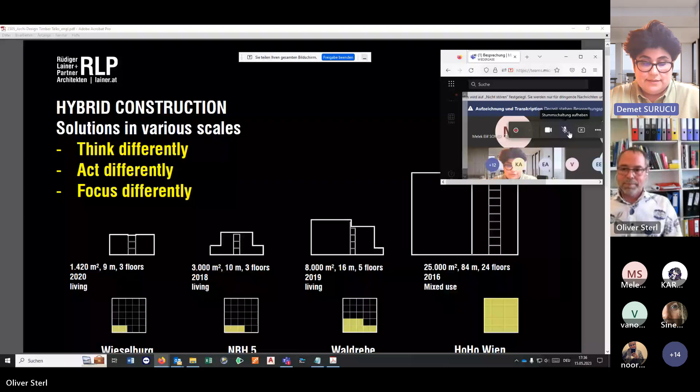Sterl has also made significant contributions to architectural endeavors such as the housing complex and kindergarten, Haus mit Veranden in Vienna, the apartment and old people residence in Döbling, Vienna, 2012, and various apartment buildings throughout Vienna, 2014. Sterl has displayed a strong commitment to architectural excellence and innovation. He has been involved in notable projects such as the extension of Schottenring 19 in Vienna, the residential project Sonnwend-Quartier, the apartment building and service apartments in Quartier Belvedere Central 2018, and the pioneering timber high-rise HoHo Wien in 2014.

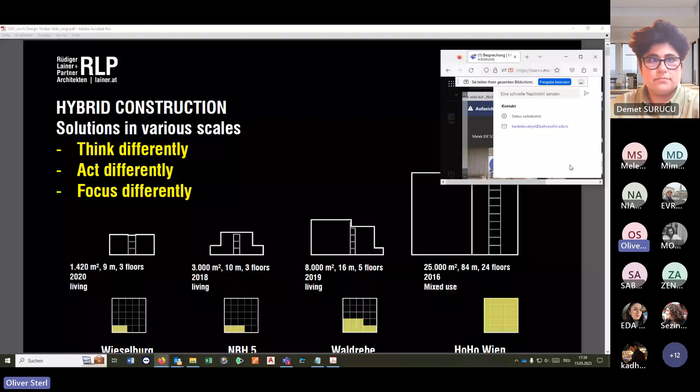We have an 84 meter high wooden skyscraper, which is called the HoHo, the Holzhochhaus wooden skyscraper in Vienna. We have a 3-story row house and a 5-story ensemble of 3 wooden buildings.

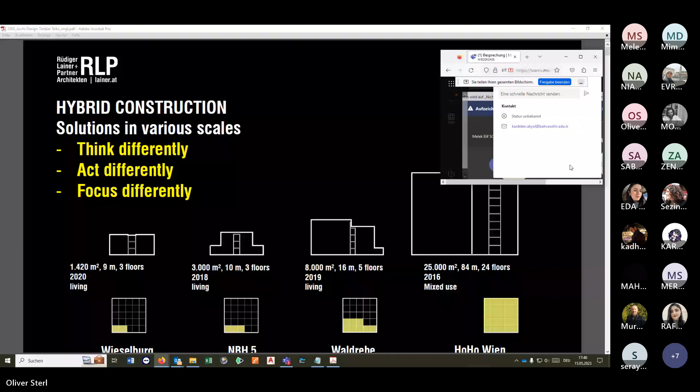Architecture is a team sport, and this is part of our team. We currently have 18 employees. The office is situated right in the heart of Vienna and was founded some 40 years ago by Rüdiger Lainer in 1985. Since 2005, almost 20 years, I'm partner in the office and managing director of RLP. The range of our work spans from urban development to renovations to new constructions, a lot of office and residential buildings, especially subsidized housing, in Vienna and around Vienna.

What you can see here is a sheet with examples of our buildings. I will not go into details today; we don't have enough time for this, but I will focus on the wood and wood hybrid constructions. First of all, nobody is born as a timber architect, and neither are we. To be honest, it took us some time and some coincidences to gain experience in this field. We came across timber construction more or less by accident, a bit like the virgin to the child. It started with an urbanistic project.

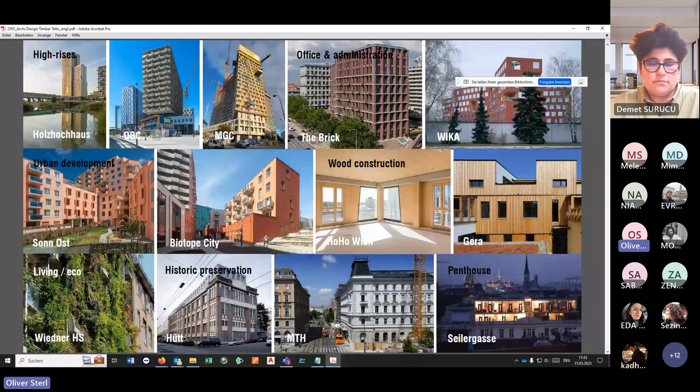A year later, 2014, this investor added a Styrian company called Schachner Haus, a timber construction company, to his portfolio. The public relations department of the company then asked if our idea of a wooden high-rise building could be implemented in the whole structure. And the result is the HoHo project, which you can see in the first picture on this sheet. That was the beginning of our career, if you want so, as timber architects. Since then, we have been transferring these ideas from the HoHo project to smaller and not so tall projects.

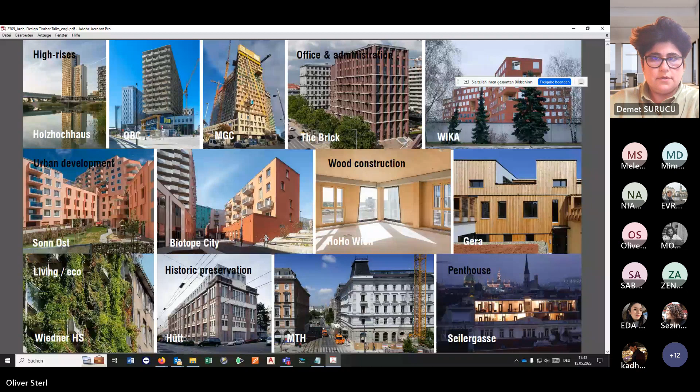In 2014, at the beginning of the planning of the HoHo project, the legal situation in Austria was that constructive timber buildings up to a maximum of 3 stories were permitted. No higher buildings in wood were allowed. A high-rise wooden building with a height of 84 meters, as you can see here, and around 24 stories was then and is even now definitely much too far outside of this regulation. So the concern of the building authority, not only, but especially, was the fire protection regulations.

Therefore, before we started planning the object, it was necessary to develop a strategy on how to communicate and enforce such a project in the mind of the decision makers. The base for these considerations was the Viennese Building Code. More precisely, it's paragraph 2 of the Viennese Building Technology Guideline. It's a horror word. This is the favorite paragraph of all architects, and of course it's a favorite paragraph of mine too, because it says that it is possible to obtain a building permit for components that do not meet the normative or legal requirements. You can do this if you can prove that you fulfill the protection goals that lead to those guidelines. And this is exactly what we have done.

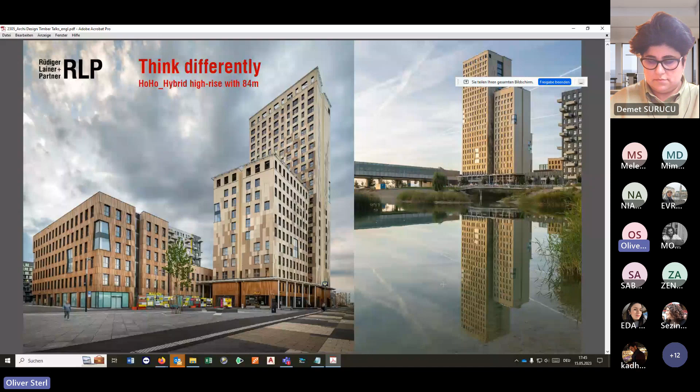At the first meeting, we estimated that the chance of getting kicked out was about 80%, and the possibility of achieving the target was, we would say, less than 20%. But after getting out of the meeting room, we were very optimistic that our chances had now increased massively. And after a few more meetings, we saw a light at the end of the tunnel. A few more meetings later, we were convinced that there was a basic possibility for the approval of an 84-meter wooden skyscraper. And this was the time when we really did start the planning of the building.

So we had regular meetings with the building authorities during which our ideas were systematically checked for stability and for fire protection. Anytime we went home from these meetings, we worked on the solutions to these issues. So if you want, we did our homework, until there were no more questions left and the building was ready for approval.

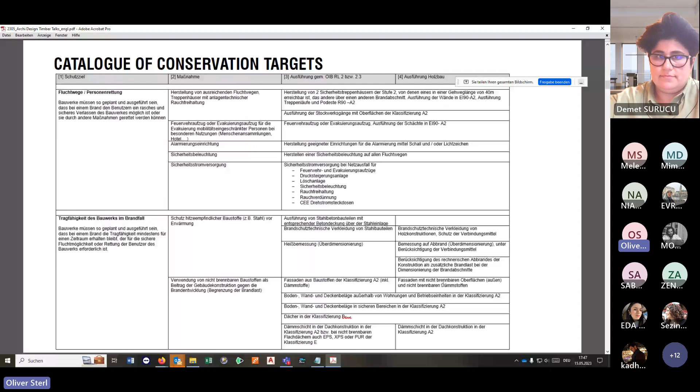But in addition to what we call institutional intelligence, the second approach was to ask the question, how simple can you design a high-rise wooden building in an urban environment? The motto was, keep it smart and simple. And the project is smart and simple in some ways. We have a very simple project in a very complex urban space. I will tell you later on about the Quartier.

The building has load-bearing exterior walls and load-bearing cores. And in between, you have a layer, which is mostly 7.5 meters deep, where you can bring in every usage very easily, and you can change it very easily. We have a simple construction. The object is a wood hybrid building. So we have a core made of reinforced concrete, and attached to that, we have a wooden structure where all the usages are. So the task was that each material is used in such a way that you can get an optimal fit of the requirements out of it.

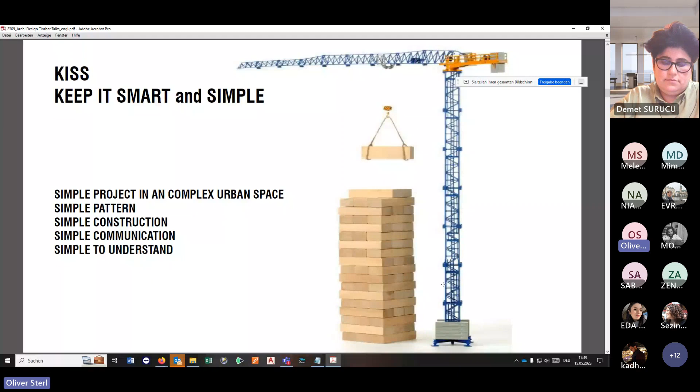And this is the object. It consists of two buildings, a high one, which is 40, 57, and 84 meters high, which is called HoHo Wien, and a smaller one, which is called HoHo Next, which is 13 and 23 meters high. They're connected underneath with garage and technical areas.

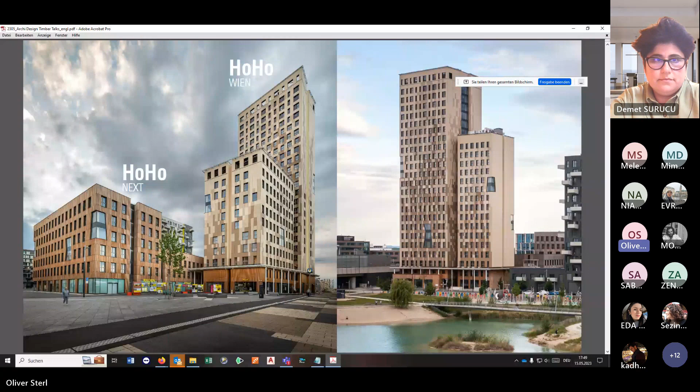The project is situated in the Seestadt Aspern. This is a 240 hectare wide urban development area in the northeast of the city of Vienna. When this is finished, about 20,000 people will live and work there. I think about 13,000 have already moved into this area.

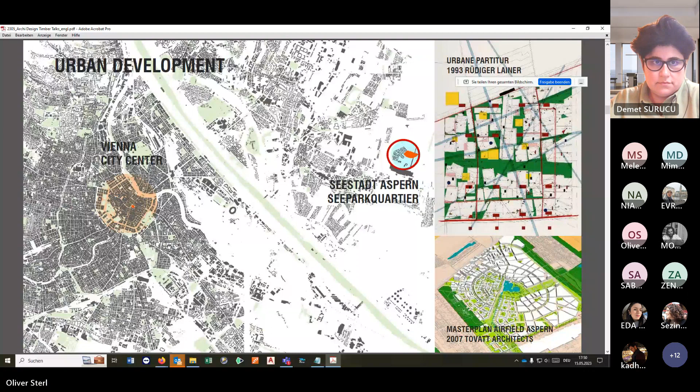The master plan was created by the Swedish colleague Tovatt, and the concept has a lake in the center, as you can see here on bottom right, and around it you have a loop, and then you have various construction sites which are built since 2005, since Tovatt won this competition. And one of the construction sites is in the south of the lake. Our office won the competition in 2011. As you can see here, it's 11 hectares wide.

And the idea was to develop a piece of land along a sequence of plazas, which we call transversale. This is the main axis, and this is nothing more or less than a sequence of plazas with different urban qualities and different urban situations. You can think about it like a chain necklace. The main axis is connected to the nature in the north, the lake, and to denser areas in the south, with beneath axis we call capillar. And in between you have different building sites which are developed since now.

What you can see here is not the master plan. This is one of 20 test designs, so we can think about what would be the best master plan to get for this area, because it was a very complicated and very complex thing to have what we call Urbane Partitur, where we just made some rules for each building field.

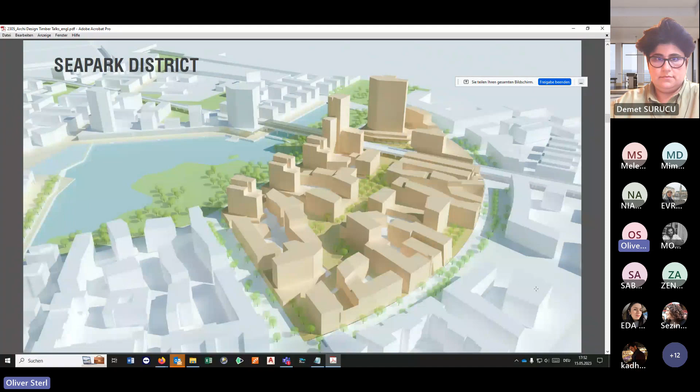So for this Seepark district and the surrounding districts, what we made is a high tower study. With all the twists and shifts and proportions and heights of the towers, we create a unique skyline to the lake. And this was very important for this very flat area in Vienna. So you have some points of orientation and identification. This is a surplus for everybody who is using this area. And one of the buildings, as you can see here in the middle, is our HoHo building.

So the HoHo building is a European skyscraper. This means it acts and interacts with its surrounding. It's part of the urban context, which we call Seepark Quartier. Because of the situation at the end stop of the subway U2, we have two totally different urban situations. First of all, if you come out of the subway station U2, you enter the plaza. And this plaza is not only the plaza in front of our building. This plaza is the entrance to the Seestadt. This is the entrance to the Seepark Quartier.

And therefore, it was very important to have a mixed use building with hotel, restaurant, shops, office spaces, wellness, fitness, health, beauty, and so on, which brings 24 hours of life on this plaza. And then when you come out of this plaza, it's always important to have what we call a human scale in approaching. Therefore, we stepped down the volumes of the tower to the plaza to create a proportion where you as a person can relate somehow with the height of the buildings. To it, we have a sheltering roof coming out of the first floor of the tower. This sheltering roof gives you a kind of optical line where you as a person can relate to the whole situation.

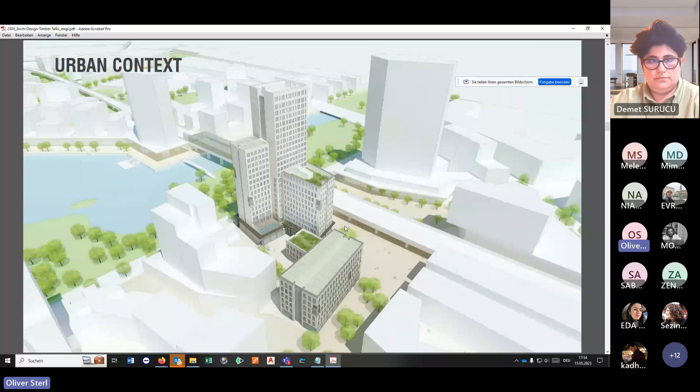So the second urban situation is to the lake. Here, everything is about orientation. Everything is about identification. Here, the building has to be high. It has to be strong. It has to have a very strong appearance.

Flexibility and variability are the basis of this project, of course. So we have two cores, which you can see here as magenta cores. And around this, we have a layer of free space where you can bring in every usage very easily, and you can change it very easily. With those two cores, you can divide each floor from 1 to 3 units.

And the whole thing was thought from the beginning on as a shell and core system. So this means the shell is fixed and the core is fixed. And we didn't know the definite users. We didn't know the definite usages which are in there. And to show the capability of this building, we drew floor plans, as you can see here, for every usage and every floor.

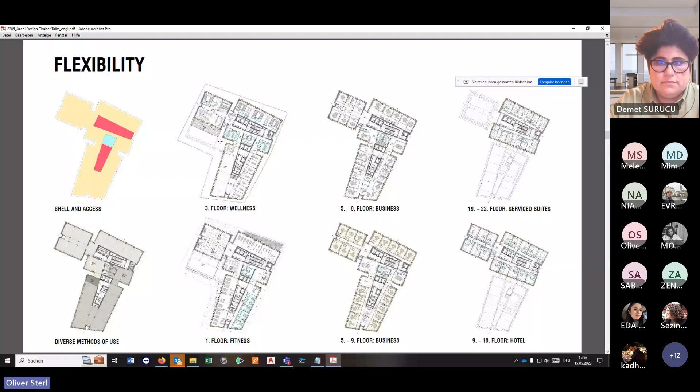This is a hybrid building. We have a reinforced concrete core, which is made on site. You can see it here on the right side of the sheet. To that, we have a wooden structure which is attached to that. The wooden structure is a prefab structure. So we have parallel production processes. So you can optimize the assembling and you can minimize the building period.

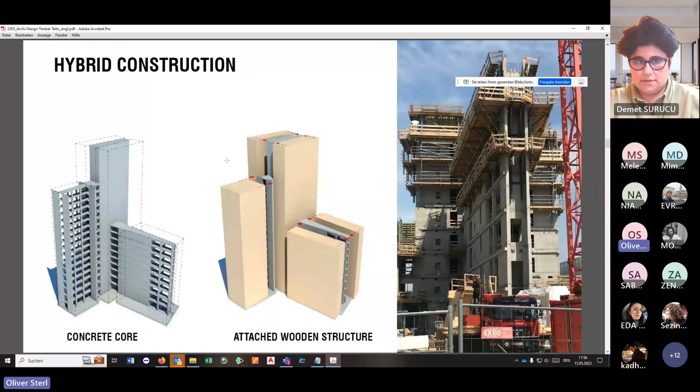And you can minimize the building period also because the system is so simple. The structure is built up like a child's construction set. We have only 4 elements. So along the facade, we have a horizontal reinforced concrete beam, which is running around. This is mostly for the very, very unlikely case that some of those corner columns would collapse.

On this beam, to expand to the core, we have wood concrete composite elements, which consist of 16 centimeters CLT, cross-laminated timber, and 12 centimeters of slab on it. The elements are 2.40 meters wide and 7 meters deep. They're made prefab, brought to the site, then they are lifted up, put side by side, and then they are just sewed together, as you can see here and here, with very little moisture. So the whole thing would be shear stiff. This is the load-bearing system for the ceiling.

The load-bearing system vertically is made of wooden columns, which are made of glued laminated timber elements. They are always 40 centimeters deep, and depending on the load they get, the width is different. So on the top floor, they are 32 centimeters wide, and on the ground floor, we have 108 centimeters wide columns. It's the logic of a Christmas tree. So this is the whole load-bearing system.

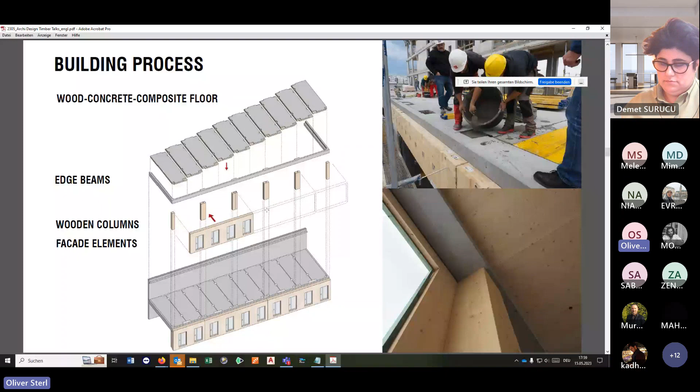And as you can see here, the column was assembled on the ground floor, then the whole thing was lifted up. And so we could more or less fix it with those needles, as you can see here, coming out of the column. The whole element was fixed, the beam was put on it, the ceiling slabs are on it, and the whole story was finished. And it took us about 1 week per part and story, depending on the wind we had outside on the construction site.

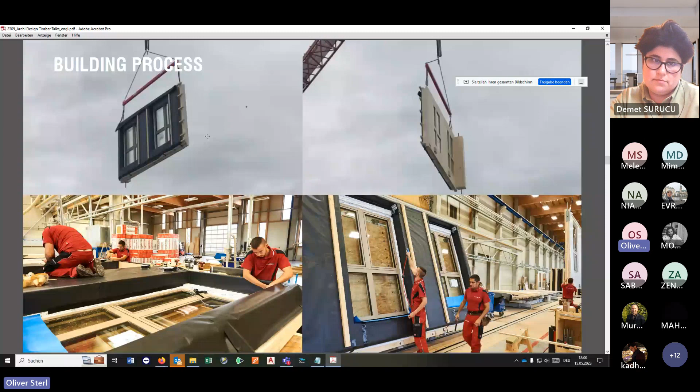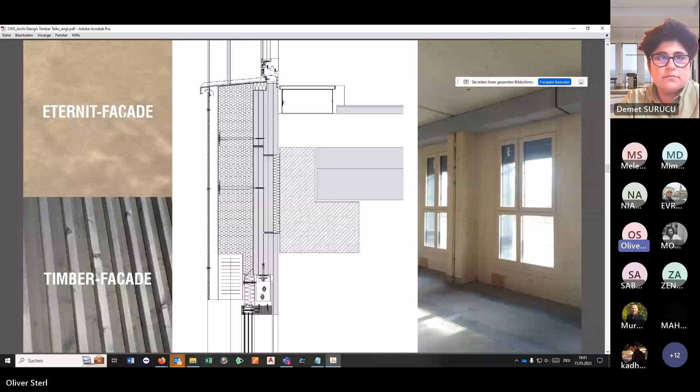So as you can see, we have visible wood. Columns, walls, and ceilings are visible, not only on the construction site, they are visible right now in usage as well. And this is very important for us, because if you're walking through this building, you can see this is a wooden building, you can feel it, you can touch it, you just know that you're in a wooden house.

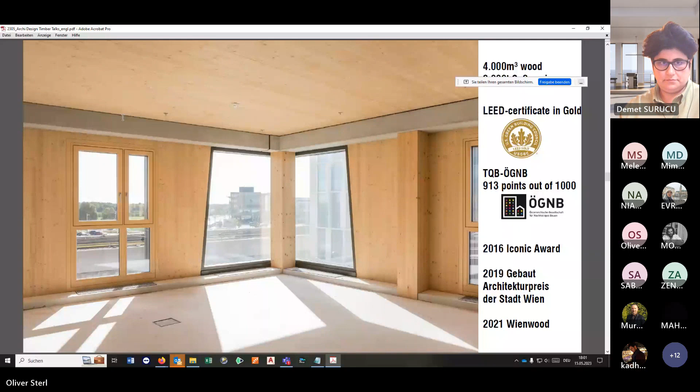So we come to our second project. Now we're talking about act differently. This is a little bit sad for me, this story, but you will understand. Not everything in life works 100% perfectly, not even in the life of an architect. This example is about the fact that for the implementation of wooden buildings, you need increased care and collaboration, from the planning to the construction to the site use.

Timber construction has been a successful building method for centuries. You all remember we have wooden temples that have existed for over 1,000 years. The Fogong Temple in China, for example. But if you talk about modern timber construction, you have to deal with the modern society. And this modern society has massively changed their way of life, as well as their demands and their behaviors in the buildings compared to the old times. So for this, you have to think differently and act differently.

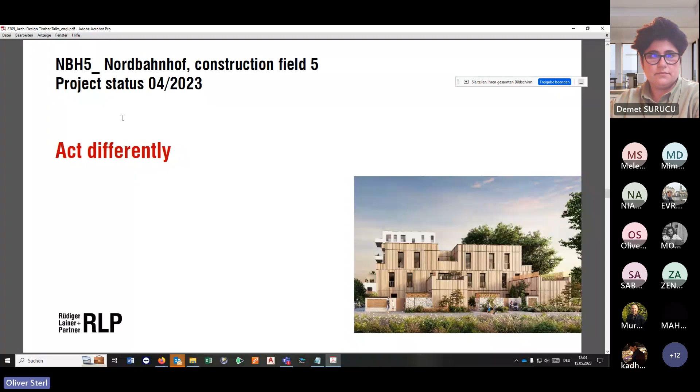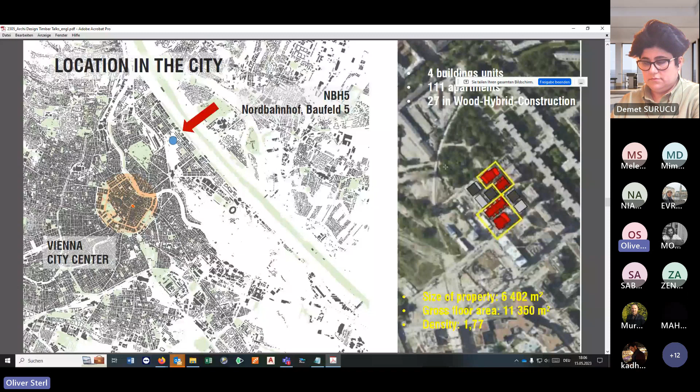So we won the competition for this development site in 2018, and our urban development concept worked with what we call carpet development, with 2 lower, as you can see here and here, and 2 higher buildings. The higher buildings are used for gaining a lot of square meters. This development creates an urban proportional connection to the surrounding buildings, as you can see here, which are quite dense, but also with the lower buildings to the open central space, as you can see here.

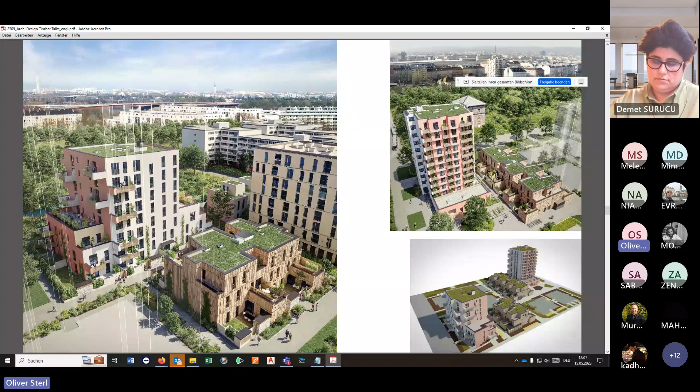For reasons of efficiency, the higher structures are built in conventional construction, like reinforced concrete, steel, glass, thermal insulation layer, as you can see here. And the lower buildings are designed as timber hybrid buildings. The construction of the 2 timber hybrid buildings is very simple. You have a backbone with sanitary rooms and shafts, which is made of reinforced concrete on site, as you can see here. And attached to that, we have a timber construction, which you can see here.

We now have exterior walls in a kind of timber frame construction and ceilings as timber flat slabs, which are made of 22 centimeters CLT. And we have a 10 centimeter extra heavy layering on it for the noise protection.

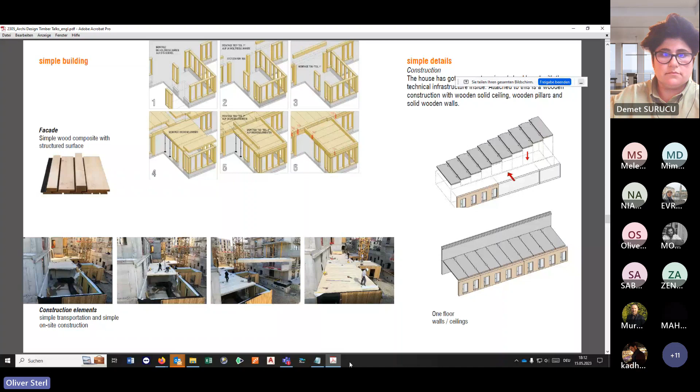And that is what results from it. We have to renovate and restore the whole thing. A house was built around the house, and under weather-protected conditions, indoor if you want, the components were dismantled layer by layer. They clean it, they sterilize it, they dry it, and then they restore it.

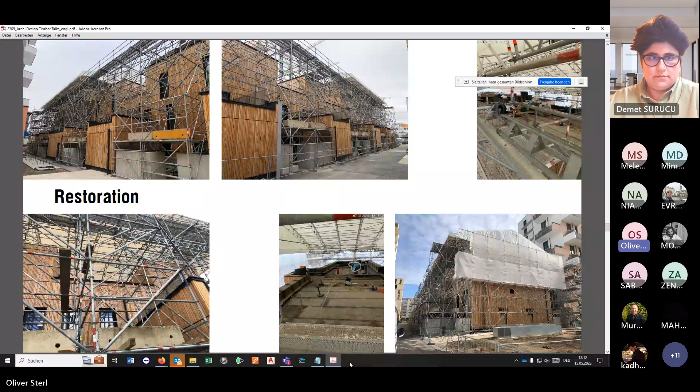So every construction project can only be successfully implemented by all those who are involved working together. I think the major problem is you have to bring the people together and they have to work together. In timber construction, special care must once again be taken with this collaboration. In the design process, you always have to consider how, by whom, and under what conditions those elements you plan will be assembled together.

Everything should be designed as simply as possible, so that you provide resistance and tolerance to construction failures. It's not enough just to do your part of the planning well and without errors. This is the basic. In timber buildings, everyone involved must always think and act together, and just in this way we can get the best possible result. This collaborative workflow can save you a lot, really a lot of problems.

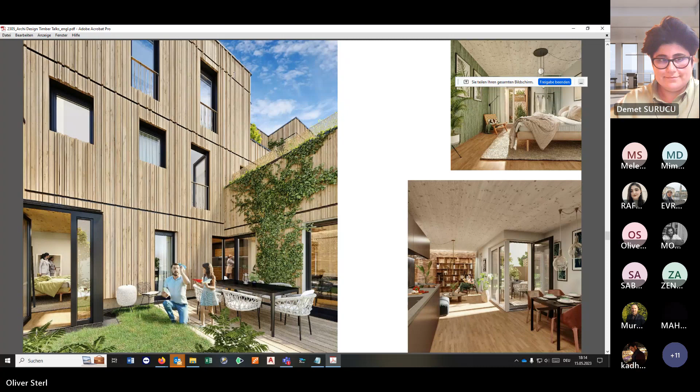But now we go to the third example for today, and this is a very happy example because tomorrow I have the next meeting where we try to deal with the costs of this project. And the story I will tell you now.

Due to the pandemic, the shortage of raw materials, the energy crisis, and the supply problems, construction prices have become massively more expensive in the recent 2 or 3 years. This is a competition project of 2019, and from 2019 to now we have a rise of costs of about 30% in Austria. This leads to an evaluation and readjustment of the profitability of every construction project.

Depending on the type of project, either the expected return on investment is adjusted, or in the case of subsidized housing, the cost ceiling is defined. There is no other way. Achieving such a cost ceiling requires, especially in timber construction, flexible design concepts and strategies on how to implement the project in the changed economic environment. This has to be taken into account already in the design phase.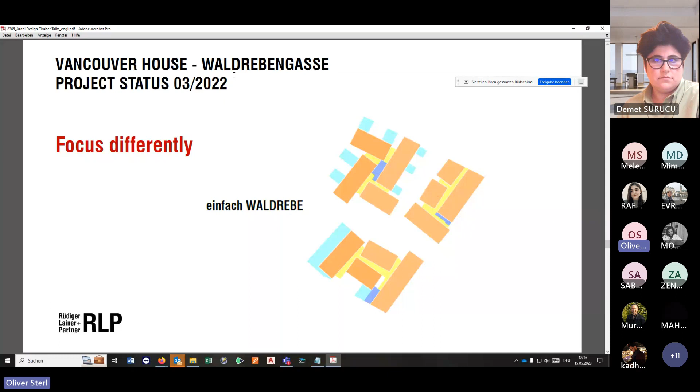So as a final example, I show you this project, which is called the Waldrebengasse, where we are currently going through this process, sometimes painfully. This project is a winning developer competition from 2019. I'll tell you later on what developer competition means in Austria.

The site is located in the north east of Vienna. As you remember, the site of the first building is somehow here. The site of the second building I showed you is somehow here. And this is the third building, so they're somehow close together. We have to design 108 rental apartments, a kindergarten, 15 units for assisted living, and 11 units for single parents. And all this together in a wooden building.

The surrounding of the building, you can see, is a very heterogeneous area. So you have big supermarkets there, you have commercial centers here like this, and you have small one-family houses and some row houses which come from the 1970s and 1990s. The size is quite small. So we have a property of about 4,700 square meters.

And the thing is, if you have a developer competition, the developer and his team apply for a site, and they have to apply in a competition. They bring the best project. They tell the jury what qualities their project has, and for this, they get the chance to buy the site. And the site has a price.

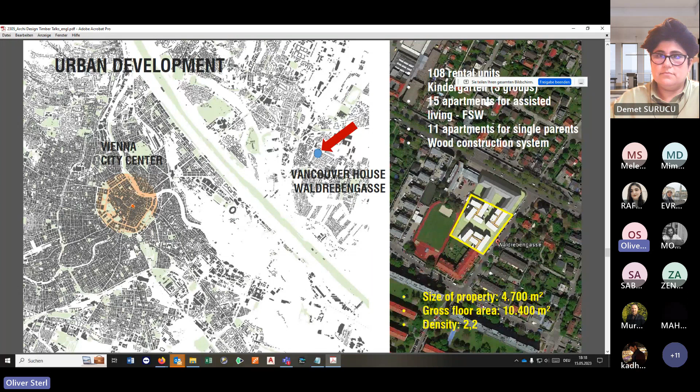We can achieve this density by arranging 3 different buildings on the site. And the task was that the building fronts to the street meet the proportions of the surrounding buildings somehow. And we create a free space with different qualities and different free urban situations. One thing is that the main part of the free space is somehow lowered, so we can get natural light and natural ventilation into the garage area.

And probably you remember what I said about the HoHo project. We learned there that it's very, very hard, if you focus at a very early stage on a specific material and a specific building construction, to get an economically optimized offer. So what we did here, we invented the idea of what we call the OBSYS system, open construction system. And this is nothing more or nothing less than the idea that you choose the building materials and the building structures depending on the local resources you get.

So for example, if you take a ceiling, like we have a ceiling here, as material you can have cross-laminated timber, glued laminated timber, or solid wood elements. As a construction, you can have flat ceilings, beam ceilings, ribbed ceilings, or box ceilings. The layering can be either made on site, or it can be made in the factory, so you have a prefab element. And the same thing happens with the wall.

You can have the material cross-laminated timber, glued laminated timber, or solid timber, probably like a blockhouse. The construction could be a solid wood construction, a beam and column construction, frame construction, and a block construction. The core can be made of reinforced concrete, or it could be made of wooden elements. So each material is used the best way to fit the requirements. And this is very, very important, that you have the freedom later on to change those materials and those constructions. Otherwise, you won't get any economically optimized offer.

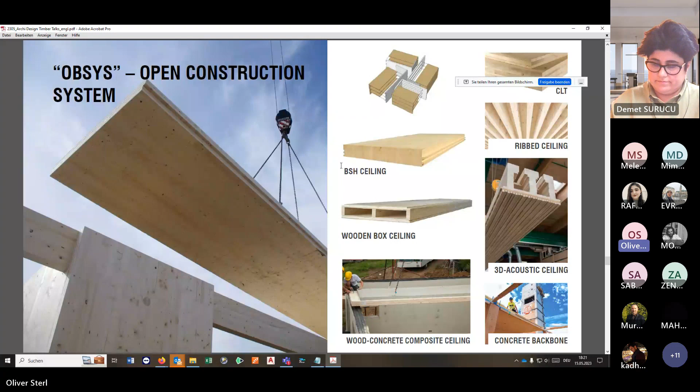The Waldrebengasse competition project is a hybrid building, as you can see here, with the core made of reinforced concrete. Attached to that, there is the wooden structure. The free span is about 7.5 meters, which is a little bit too wide for the economically optimized hybrid wood-concrete composite element, which would be about 7 meters. So we invented what we call leverage, where the slab is laying on it, and with that we have a horizontal shift where we can bring some pipes and some wires in there to have more flexibility for the whole building.

The construction is a load-bearing exterior element made of 14 centimeter CLT with some non-burnable thermal insulation layer on it. And the outside is a wooden facade, a curtain wall with different vertical planks made of larch. So this was the project we had at the competition.

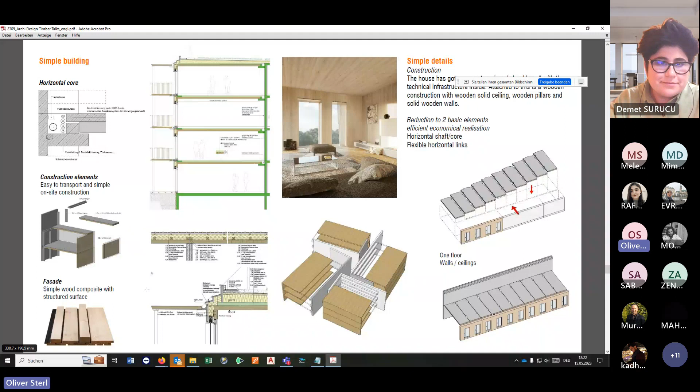And the structure and the typological intelligence, as we call this, of the building is very, very simple. We have a load-bearing interior core, as you can see here. We have load-bearing exterior walls, and we have a layer. This is 7.50 meters deep from here to here, where you can bring in every usage very easily. You can change it very easily.

And you also can bring in the different sizes and qualities of living apartments in different floors, because you have no load-bearing elements which are somehow cutting this free span. The points of delivery and for bringing away all the waste are situated on the core side, and for this we have even more flexibility to bring in different sizes of apartment and create different qualities, therefore.

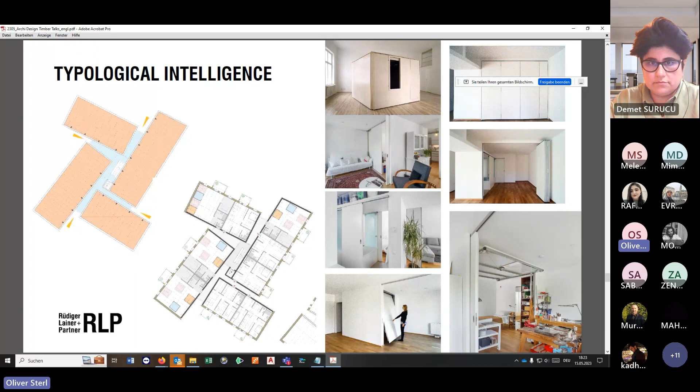This is a very important part of the cost intelligence, the question what to do with garages. In Vienna, we are forced to build many parking spaces for residential buildings. It's one parking space per 100 square meters of living space. So we believe that the mobility behavior will change rapidly in the coming years. This trend has already started. In Vienna, currently, the city has the lowest car ownership rate of all federal capitals in Austria.

And the percentage of pedestrian zones and shared mobility zones is steadily increasing. So what will we do with all those parking spaces when the cars are no longer needed? Our answer was to create what we call an added value zone. So by lowering the central free space, as you can see here, we can bring daylight and natural ventilation into a part of the garage, which we call added value zone.

And if you don't need the parking spaces anymore, you can easily change this area into sports and culture and play and recreation. So the idea is that you can give people back the space the cars took from them.

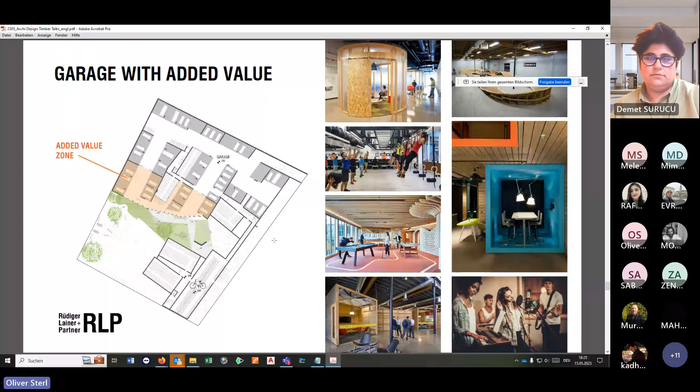It's a specific of the developer competition that the team of the developer, architect, and experts, whatever is in there, have to guarantee certain qualities of the project for the jury. And they not only have to guarantee the qualities of the project, they also have to guarantee the price.

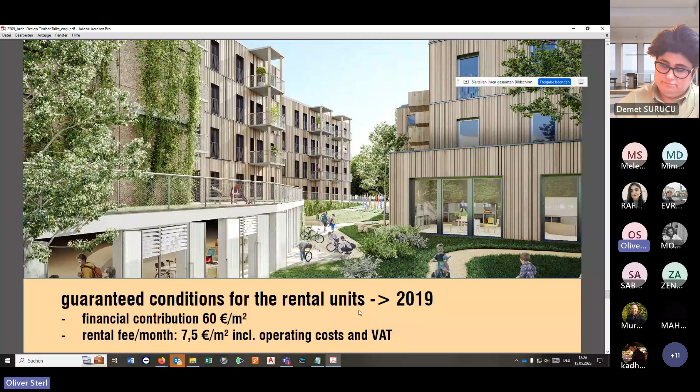In 2019, the guaranteed price for the rental units was a one-time financial contribution of 60 euros per square meter of living space. And the monthly rental fee was 7.5 euros per square meter. And this includes the operating cost and the value-added tax. So this was 2019. And we knew it's going to be somehow very tight.

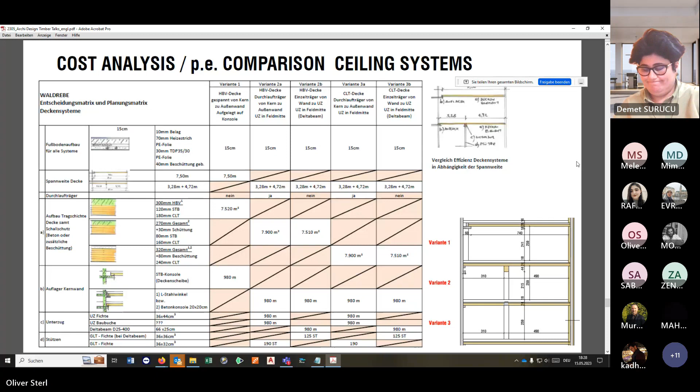And we calculated all the masses of this, and then we asked a construction company, which was on board since the competition. And here the practice partner recommended that the wood concrete composite, as we had it in the competition, was the most economical variant, and we should therefore take this for the next planning step, the permission planning.

But then we had the problem with the costs. So from September 2019 on we had a very volatile market for building materials, and wood was in between, as you can see here. In June 2022 it was around 72% more expensive than in the summer of 2020. So it's going down, but overall in December, when we started the cost cutting process, we had for the material wood plus 32% from the beginning, and overall plus 34% from the beginning.

And this changes, of course, everything. The general contractor with whom we coordinated the design to cost process could no longer keep the price. So we had to put the project out to tender in the summer of 2022, sorry, in the high price phase, we put this on the market.

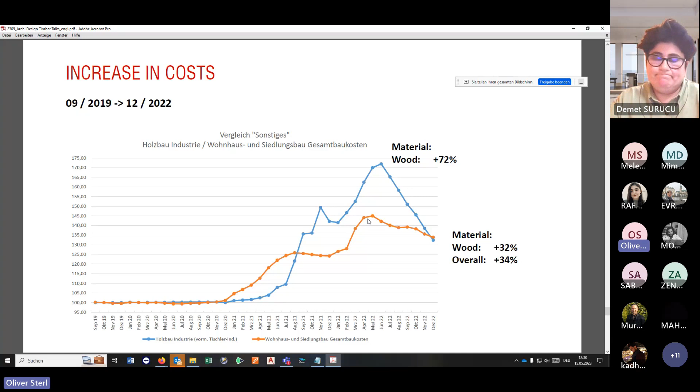The estimated price at the time of the competition was about 16 million. The result of the bid in this phase was double the price, 32 million. And at this price, it was not possible to realize this project. So therefore, we started a cost-cutting process in December 22. In this process, the entire project is evaluated and scanned for optimization potential.

And as I said before, you have to think about this at the beginning, otherwise it doesn't work. Otherwise you have a totally different project. And as you can see here, we have a kind of traffic light system with yellow, red and green: which we can do, which we can't do, which we have to check. There are over 50 points right now, for which we make renderings and details to check whatever has to be checked to get an answer, yes or no. And of course, it should stay a wooden building.

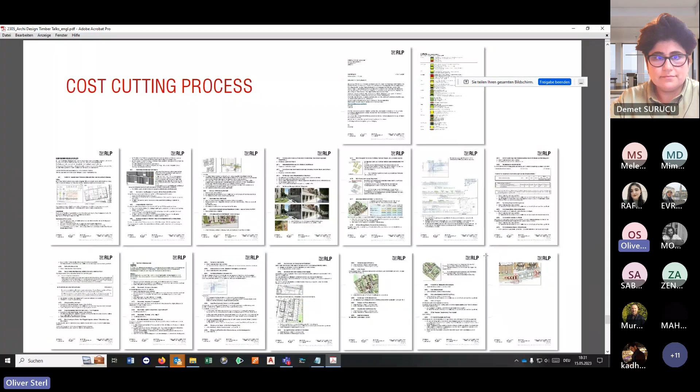So this is just one example of our cost-cutting process documents. Tomorrow I have the next meeting about this, and there we discuss another table. So if you remember, we started with a table at the HoHo and we ended at a table here right now. These tables and of course our BIM model, which is very, very helpful, and the variants we already considered in the design process in the beginning helped us navigate this very, very hard process.

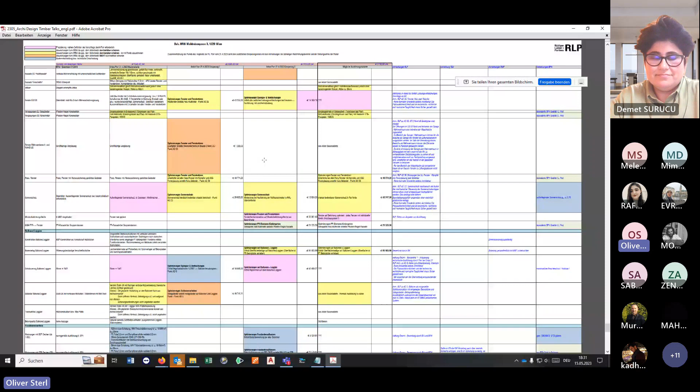And sadly, we're not there, but we are on the right track. And I'm very, very optimistic that we'll have an economically fitting system in place in some months. So this is our thinking right now. But after all, we are convinced that timber constructions and timber hybrid constructions can be implemented very successfully, also under consideration of the current technical, social, legal, and economic developments.

But to achieve this, it's necessary to change the perspective of long-used behavior and to work out new qualities with very new approaches. Think differently, act differently, and focus differently. And I hope I have encouraged you to want to try this thinking for yourself. Thank you very much.

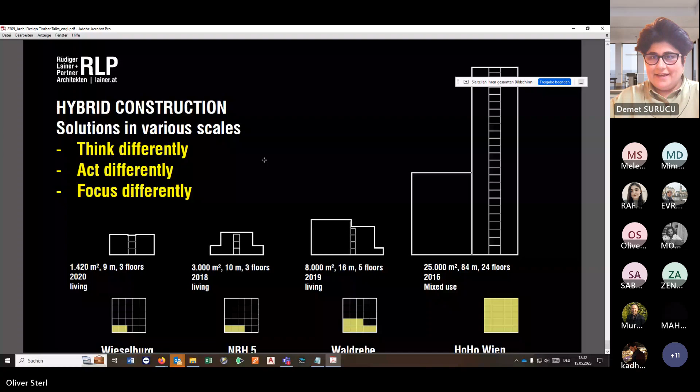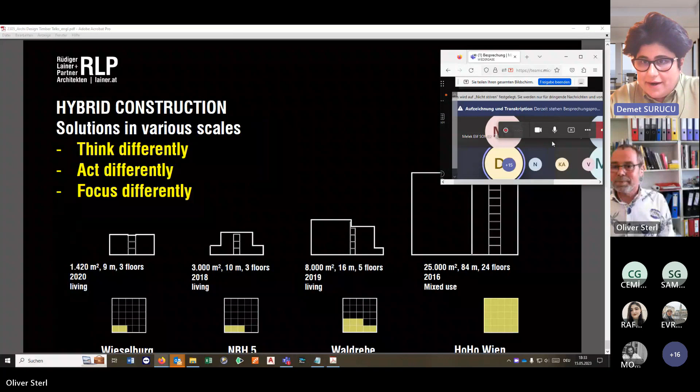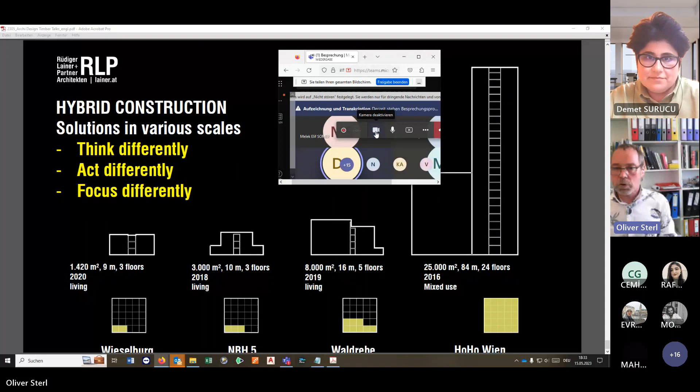Okay, Oliver. Thank you very much for this fascinating presentation. Maybe you can open your camera, Oliver. We cannot see your face now. Should be open all the time. Sorry. It says it's open. No, we cannot see. We can only see the presentation now. Okay, so probably I stop the presentation. Yes, it will be better, I think. Can you see me now? Yes, we can see you. Okay. Thank you very much again.

And now maybe our participants have some questions for you. Is there any question for Oliver's presentation? We had three projects, and I would like to say good luck to you for tomorrow. Good luck. Okay, is there any question? Maybe our academicians and students have some questions about the projects, or maybe they can share their feelings and ideas about your design and projects. No, there's no question here. Maybe I can ask a question. Okay, Elif Hocam, thank you.

Thank you for the very informative presentation, Mr. Sterl. Even in Middle Europe, where one of the sustainable targets is using ecological materials and so on, it's still somehow a battle because of the cost effectiveness, is it correct? Even if I have the target and I have to go there, if it costs too much, then second thoughts are here.